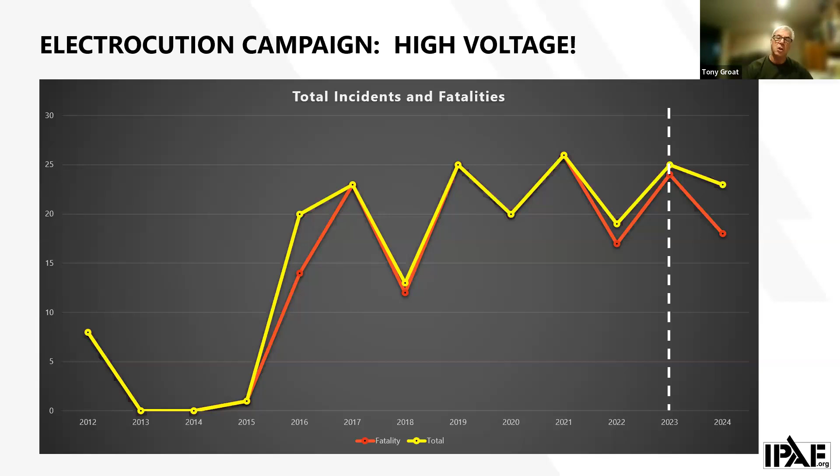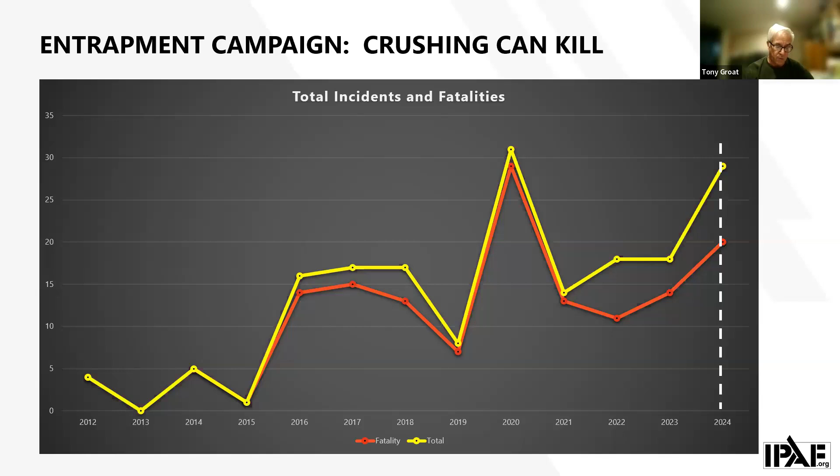Launched in 2024, our entrapment campaign, Crushing Can Kill. Here we see a rise in the number of incidents, while fatal incidents were on the upswing in 2022, following a significant decline from 2020 to 2022. The campaign received over 13,000 views from 110 countries.

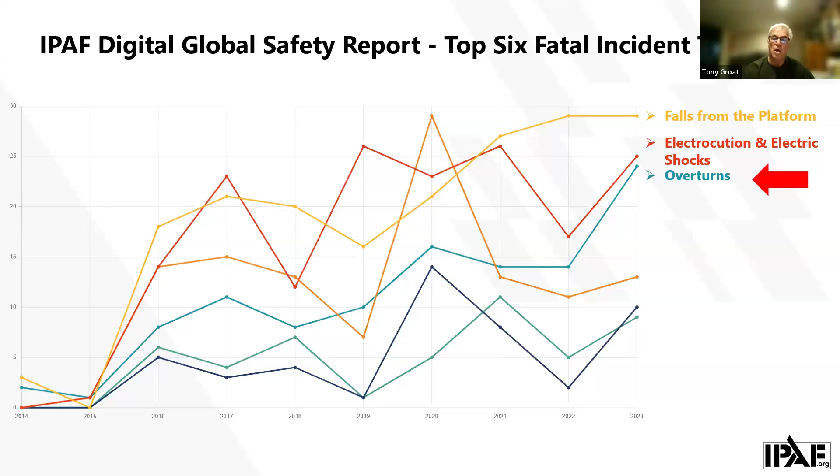So again, as we're looking at accident data reporting, this is MEWP-specific information that we as IPAF pulled through. Looking at the frequency of incidents, overturns are one of the areas that obviously required our attention, and hence we end up having our campaign on MEWP tip overs.

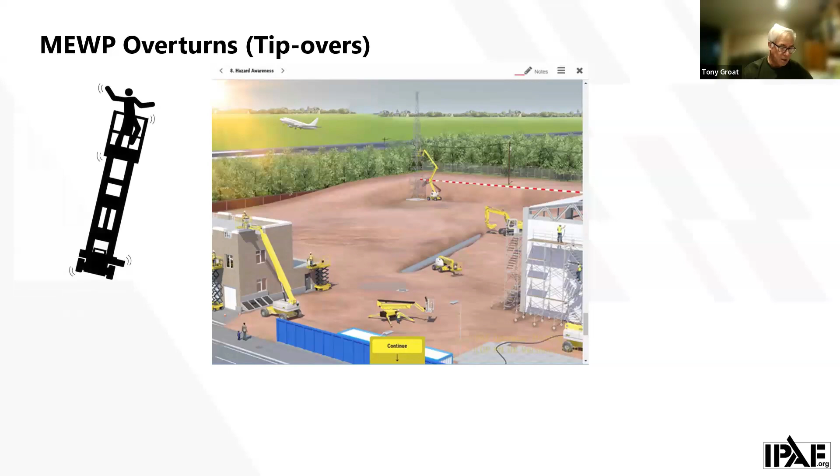MEWP tip overs continue to be a major cause of serious injuries and fatalities in our industry. With the launch of our 2025 global campaign, Stop Overturns, Safety Starts at the Ground, we are reinforcing a crucial message: ground conditions matter. By understanding the risk and implementation of proper safety measures, we can prevent overturns, protect lives, and create safer work environments worldwide.

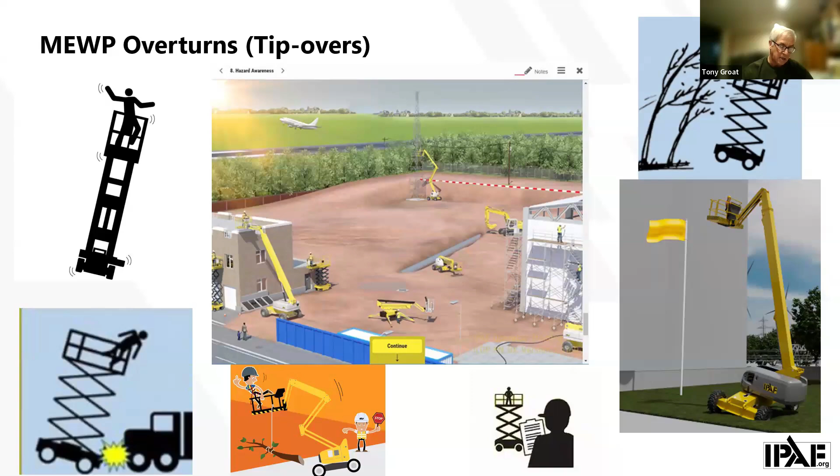Again, these campaigns are out here for us all to work together to make a measurable impact to decrease these incidents in our marketplace.

The key message we want to put out here is that these incidents do cause serious and fatal incidents. They can lead to ejections from the work platform of operators and occupants, and they can lead to complex rescue scenarios of trapped individuals at height as well.

So understand that when we're talking about overturns, overturn is a permanent loss of stability of the MEWP, so that the MEWP has overturned or partially overturned. This can include those things that are resting against an external structure as opposed to completely falling over. So all of those are what are included in our analysis of an overturn.

If we look at our data from 2014 to 2023 on overturns, there have been a total of 108 fatalities. It also includes 64 major injuries, 25 minor injuries. And these are only the reports that get reported into our system, so our assumption is there's more than that occurring globally in the marketplace.

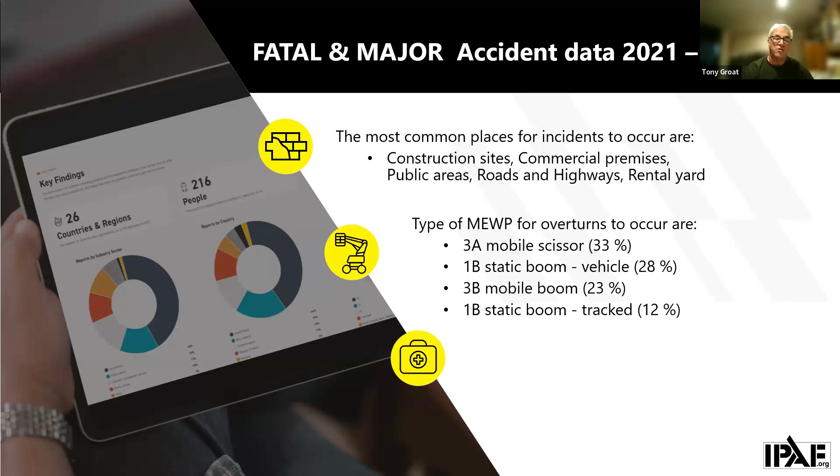So there's a wide range of products that need to be addressed when you're looking at putting in appropriate action steps. Non-fatal injuries resulted, including fractures, concussions, bruising, impact pain, cuts and lacerations. So you can see there's a wide range of impact reported that we need to make sure we're taking the appropriate steps on.

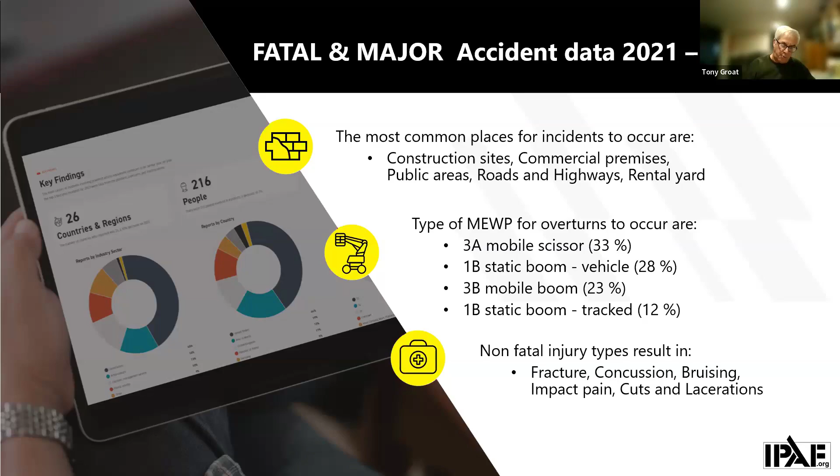Again, assessment of the ground conditions and supporting structures is really critical. And we have recently developed this new guidance document that is available free, downloadable from our website, Ground Conditions and Supporting Structures for the Safe Use of MEWPs.

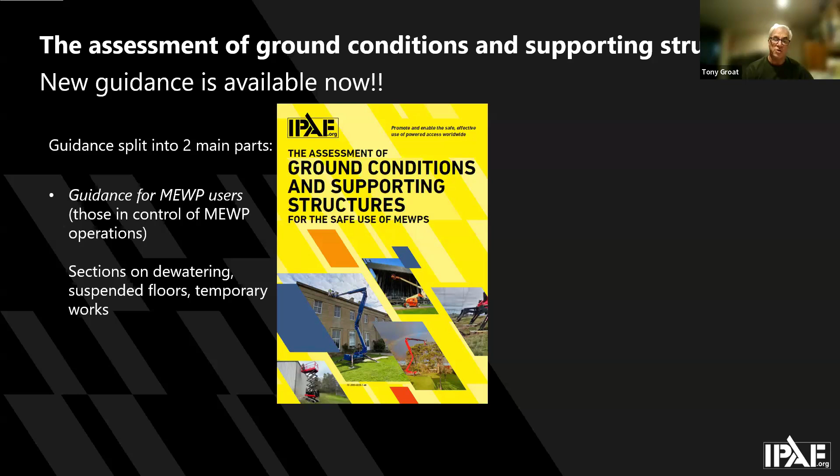So within this, you can look at, there are several approaches within this guidance document. It's split into two main parts. One is guidance for the MEWP users, and within the scope of that, that's those people who are in control of the operations, not the operating of the equipment itself, but the operation of the site. It has sections that talk about dewatering, suspended floors, and temporary works. And the second part is guidance for the MEWP operator. So it really is a wide-ranging document that provides for both planning and operation of the equipment.

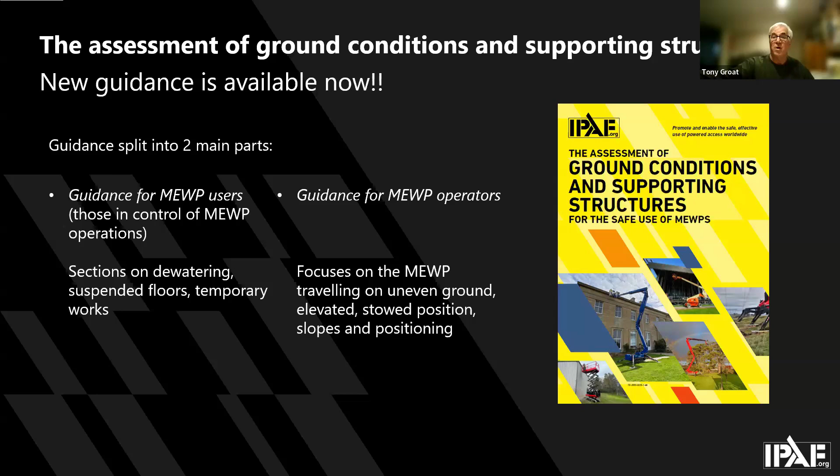And for the operator, it focuses on MEWP traveling on uneven ground, elevated stowed positions, slopes, and positioning. So there's a wide range of information in this document that ties to our campaign on being aware of it. Now this is about taking actions on how to protect ourselves.

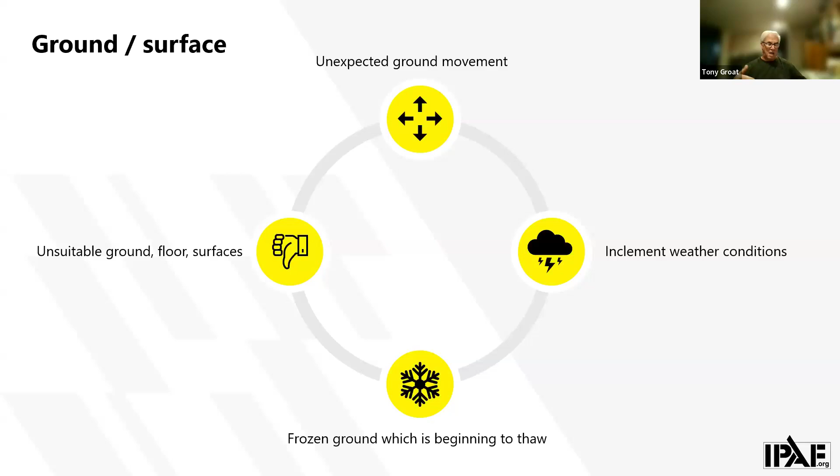So when we're looking at this information, we talk about ground and surface for the machines that are operating. So we end up having unexpected ground movement, near the edge of an embankment, or driving over a vault in the ground. So you're going to have a wide range of unsuitable ground conditions, floor surfaces, frozen ground that's beginning to thaw. So you end up having environmental conditions out there that tie into weather conditions as well.

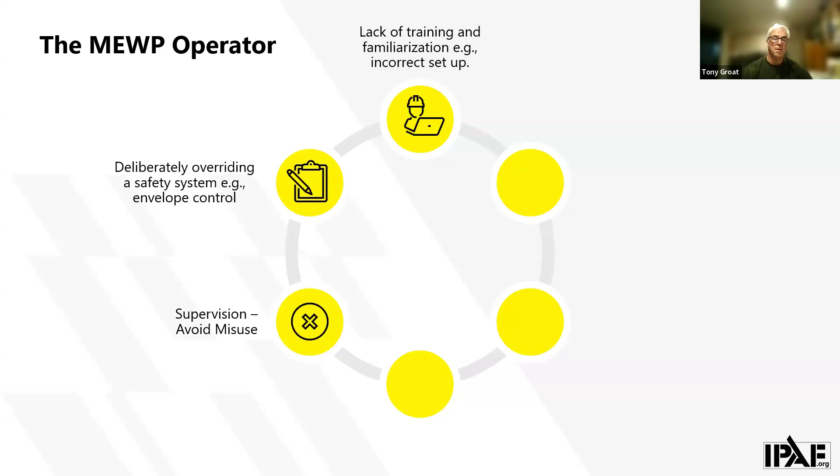So beyond the ground and surface, we also look at the MEWP operator. Within the scope of the MEWP operator, one thing we look at is a lack of training or familiarization, or incorrect setup based on insufficient training and familiarization. You have individuals who deliberately override safety systems, such as the envelope control system. We have supervision required to ensure avoidance of misuse of the equipment. Driving at height when it's not necessary.

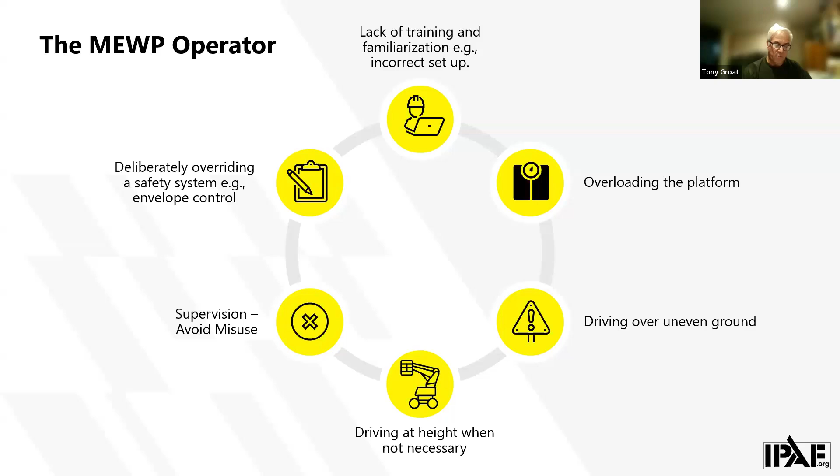So when it's fully extended, we have one of the, I'd say, weaker positions for stability of a mobile elevated work platform, and driving over uneven ground and not following all the operating requirements from the manufacturer, and overloading the platform. So again, all of these things are items that the operator themselves have to take into consideration.

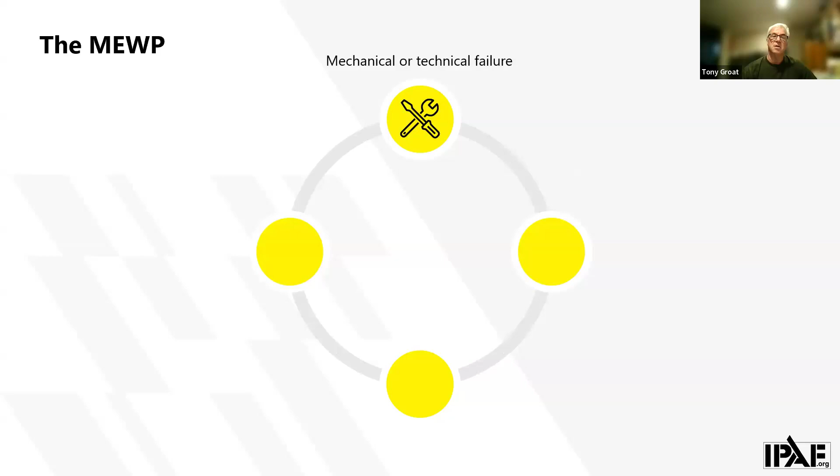And then we take the machine itself. Is it properly inspected and serviced, so that we avoid mechanical or technical failures? Are we driving it onto a hazard that's not capable of supporting the MEWP itself?

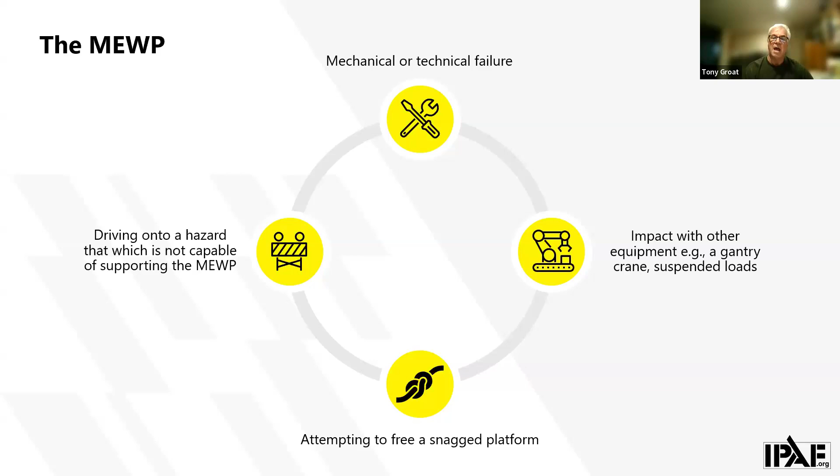So if we have a machine that's what we call snagged, as an example, where it's lowering, the platform comes down and gets snagged onto some structural item. Then what happens is that you continue to lower, and rather than the platform moving because it's snagged, it actually lifts up the machine, and we end up having a snagged platform and a very precarious situation that needs to be dealt with. And then we have impact with other equipment, gantry cranes, suspended loads. So there's a wide range that can impact the MEWP itself.

So again, planning is really critical. While we are always aware of the fact that we need proper training for operators, that is an essential component, but we need to do planning before the job even begins.

So when we're looking at this, it starts with doing a site assessment for the correct MEWP selection. We'll get into that a bit later, not just is it a boom lift or a scissor lift, but other attributes a MEWP needs to take into consideration in selection.

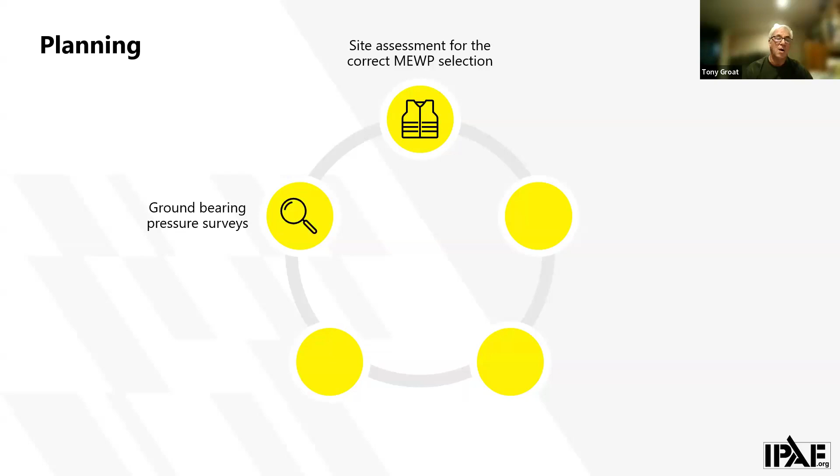The ground bearing pressure surveys - what is the ground capable of supporting?

The consultation with those in control of the site itself. Again, if you're working on one part of the job and you have other people over there doing other things like excavating around the job site, and you're not aware of them not compacting it properly, you need to make sure of the site conditions.

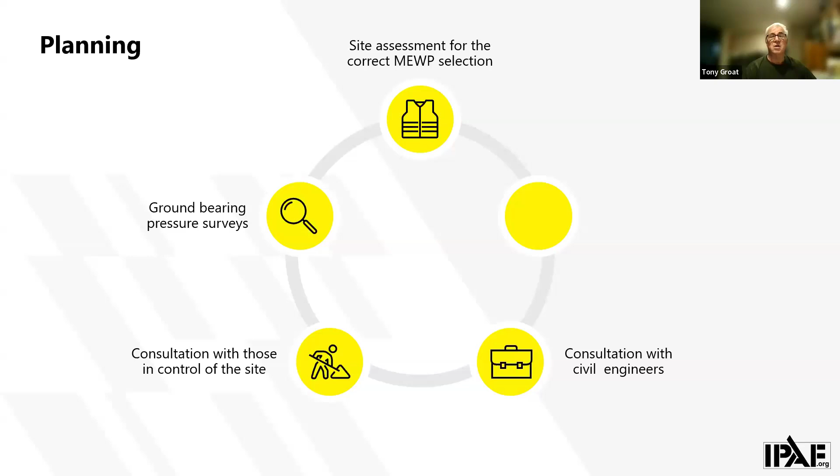When you're looking at the ground conditions, believe me, most operators are not sufficiently technically able to understand whether certain ground conditions can support the load or not. You provide them with a lift, you put them out on the job site.

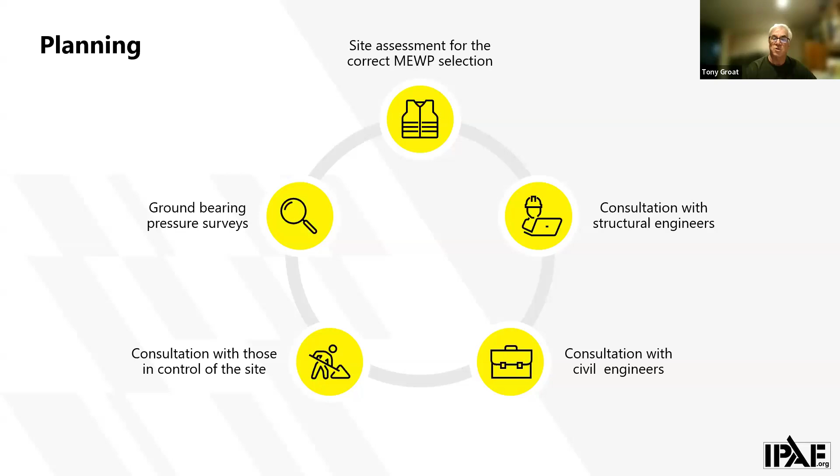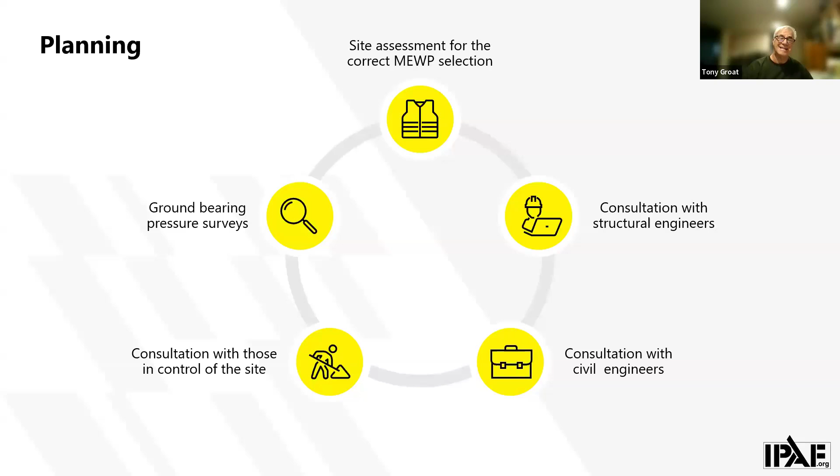So you need to, in your planning, consult with engineers - either a civil engineer or a structural engineer, based on the material that you're working on, whether it's grade material or a supported deck, to ensure that it is capable of supporting the load of this equipment.

It really is critical in training, and this goes for both a MEWP operator and MEWP supervisors - they must be included in understanding MEWP stability. When you look at our industry standards and the curriculum required for both MEWP operators and MEWP supervisors, understanding stability is a critical part of that training.

So there are many factors to consider that can impact MEWP stability. Just reading off this slide, you can see - is it a hard level surface? What is the allowable slope allowed for that machine? What is the slope of the grade you're working on? What's the platform capacity, so we're not overloading the platform? We have live loads. Are we overriding safety devices?

Oh, that thing is beeping. It's annoying me. And we go in there and try to disconnect incorrectly, overriding safety devices.

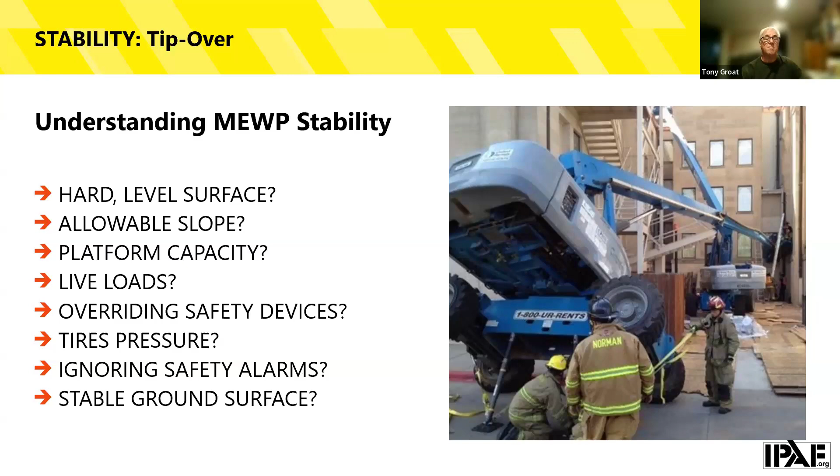Tire pressure, big item as well. Ignoring safety alarms, stability of the ground surfaces are amongst many items that must be taken into consideration.

So again, as we now look forward in understanding MEWP stability, there's a wide range of information that is important for people to really have some basic understanding of. And again, as we all know, gravity is king. It's important that the MEWP operator and supervisors understand this information. Simply stated, gravity is the force that pulls an object to the center of the earth, people and MEWPs included.

You can increase the area of the base - the wider it is or the longer the chassis, or like adding outriggers to it, provides that additional stability. So that gets into somewhat of the selection of the equipment itself.

Be aware that when you point at the manufacturer and say, well, why don't they design these things so that they're going to be greater in their ability to be stable - understand that if they increase the weight of these machines, they could become so heavy that you can't put them on any ground surface. If you increase the base of them so large, you can't get them into the places these machines need to go into.

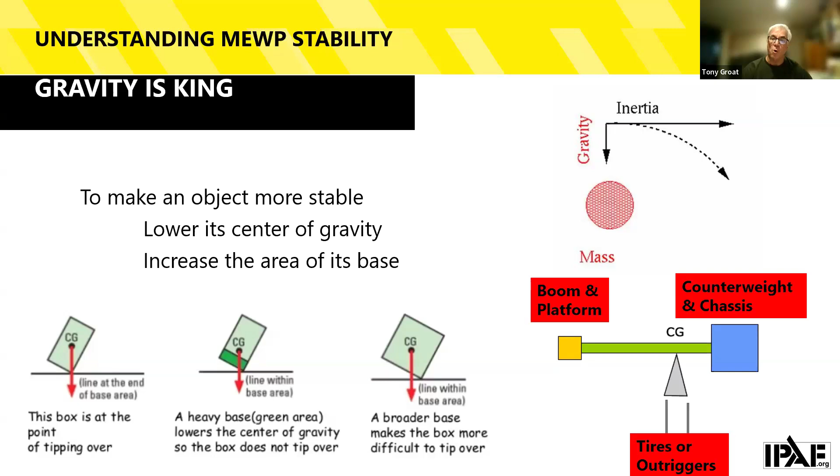So there is a design theory behind all of the machines that you're seeing out in the field, giving you a wide range of options in the selection of them to ensure that you're getting the right machine for the right job, task, and that will safely be supported by the surface that you're on.

So where is the tipping point of those machines? It's where is that load, where's that center of gravity? It really is having that understanding.

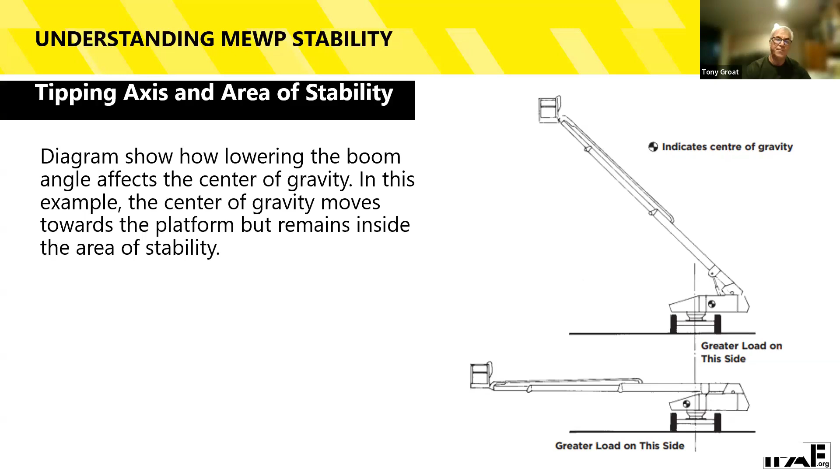So too often people go over and look at a lift and say, okay, if this machine weighs 20,000 pounds and I have 4 tires, that means I have 5,000 pounds under each one of these tires. That is not the case when you're looking at the change in configuration, because there are times when you can have almost 3/4 of the load over one of those points of contact based on the configuration.

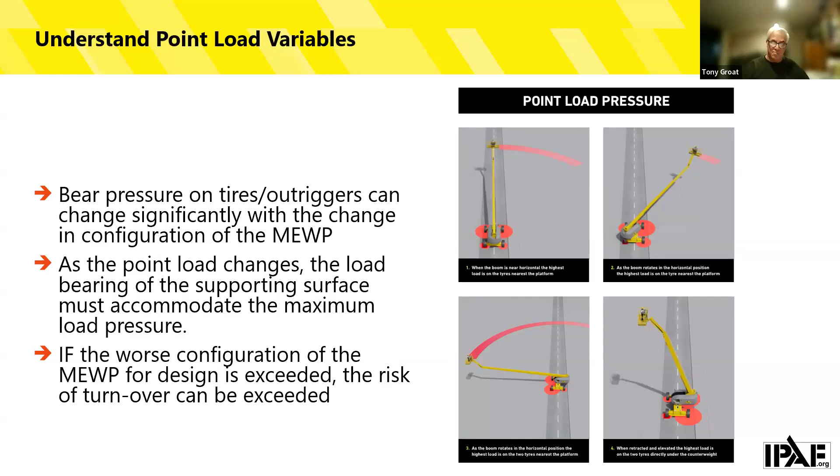So while we're looking at the selection of the MEWP, again too often we're looking up in the air. Our focus here starts at the ground. We begin with this mindset that I need to go up there, so I'm looking at what do I need to get up there, how high can it go, how far can it reach, and what's the capacity of the platform. But the ground bearing pressure is really critical.

The surface area of the point of contact of a tire of a MEWP is relatively small, which can generate significant pressure on that surface area. It's essential that an assessment of the ground conditions, taking into consideration the manufacturer's floor point loads, is carried out before even beginning a job and selecting the MEWP for the job. A tire that's too hard or too soft will impact the way the machine contacts the ground as well. When carrying people and material at height, these factors are extremely important in the safe use of the machines.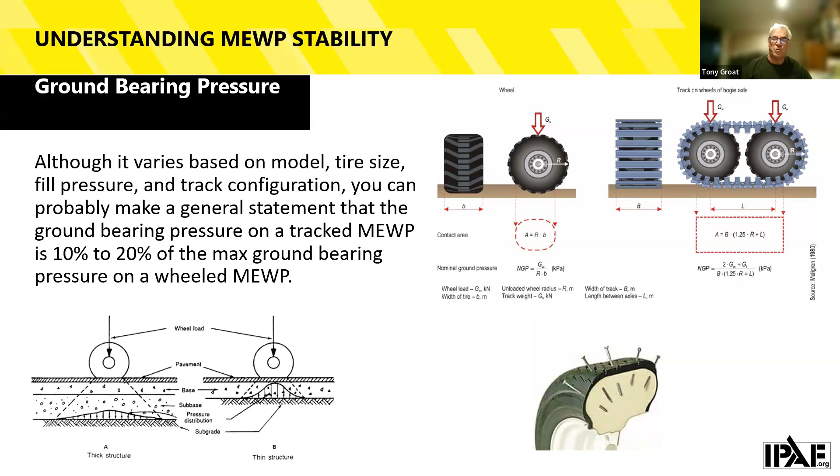Too often we'll go over and just say, okay, we could go with a lighter machine. We have machines that have outriggers on them, but outriggers provide several stability advantages that a tire machine doesn't. They increase the base of the machine to displace the load and are generally equipped with spreader pads to increase the load bearing surface of contact.

Many of them weigh much less than a MEWP that has counterweights to allow you to go to those heights without outriggers. At the same time, stability is dependent upon the distribution of the weight on the ground below, similar to the needs of tires making contact with the ground. Spreader plates used with MEWP outriggers spread that force from the outrigger leg to the ground surface.

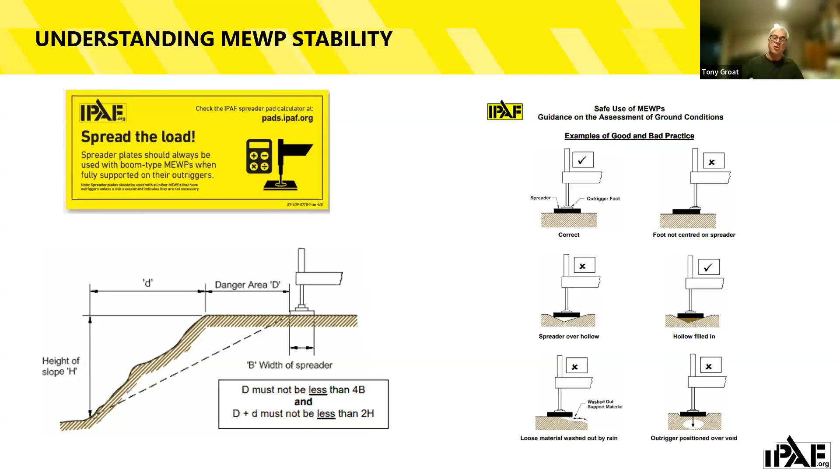A lot of times you can see the spreader pads need to have a plate underneath them to spread that load out further. Depending on the ground surface you're having, you can see all these configurations here, since too often you're not working with a nice flat surface. You need to make sure you're setting these things up properly and preparing them for use in operation.

So when we have an unlevel surface, we talk about cribbing underneath it. Think about it: the manufacturer has well designed this machine to do all the work, but now you're putting it onto ground conditions that are questionable, that they have no control over. You need to make sure you're doing the proper work to ensure that load is placed onto the ground effectively. There's lots of information out there.

Here you can read through charts: do not use cribbing on a flat surface that's not firm and capable of supporting the weight of the machine without the cribbing. Do not use cribbing over a hole, depression, or a bump. Do not crib a machine on a slope greater than 5 degrees or 9%.

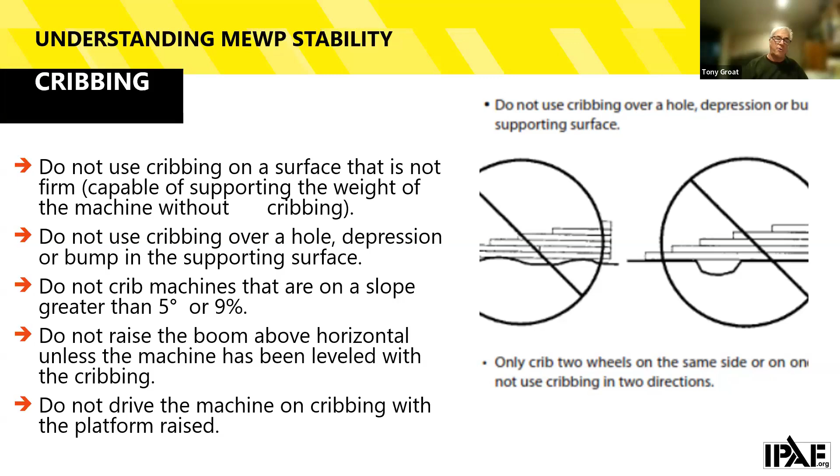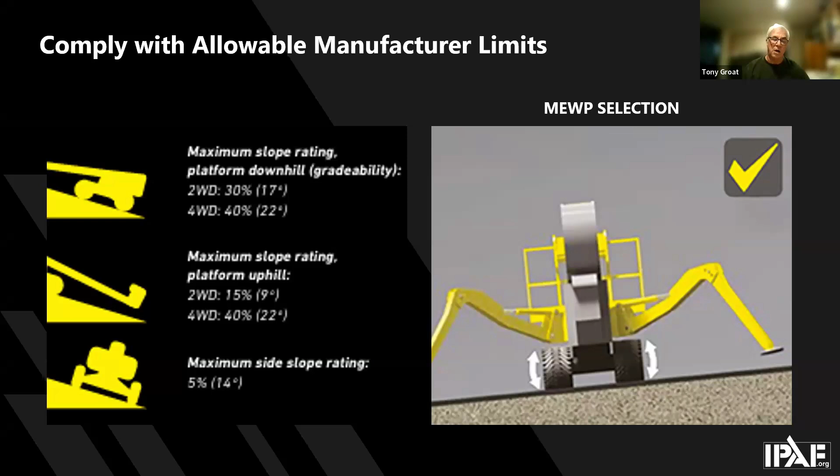The manufacturers in their operating manuals will have information that provides this guidance as well, so make sure you're reading the operator's manual to ensure you're following all of it. This is an example of some of the ratings that manufacturers provide in the marketplace. It's really critical to be aware of those and follow them in place.

This is another one of the videos that IPAF has in some of our training programs, and it talks about subsurface voids. Here it looks like we have a good flat surface to drive over, but as you're going over, we have subsurface voids.

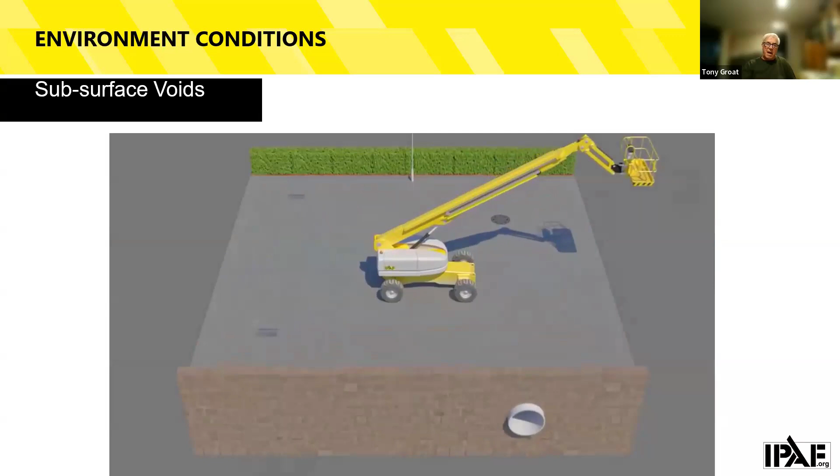It's really critical to understand that if this were a parking lot or even a parking garage, while this is designed to take the load of a vehicle or car weighing 3 to 5,000 pounds, one of these machines weighs 20 to 30,000 pounds.

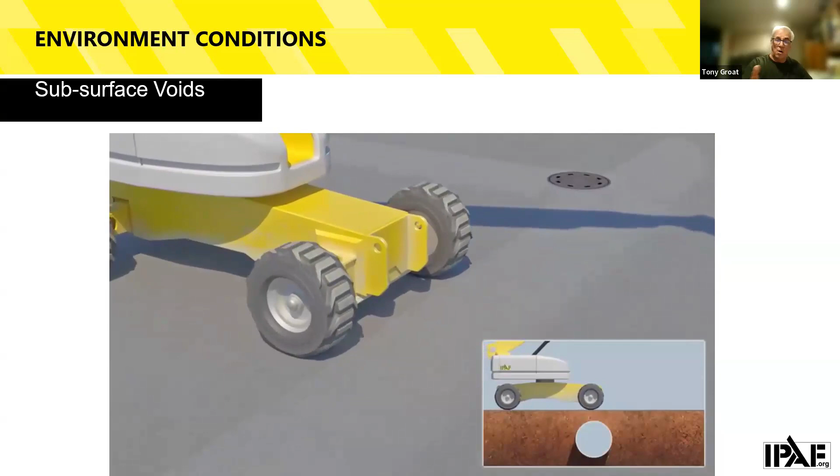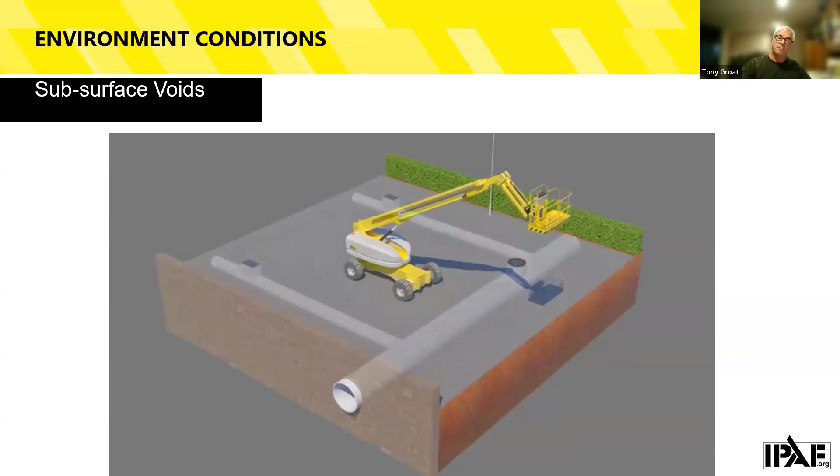So the design for this may not be made to support the load of a machine going over it, which is why we're talking about having people who understand the loading, who can tell you that information. Don't expect that an operator is going to have that information to say, oh, okay, this is fine. They may raise the flag saying, I see that this underground surface area may be in question, but you need to go to somebody who has the technical expertise to really define whether it's safe to use, and whether a different machine should be selected because of the weight of the machine.

Our focus for this campaign is about ground surfaces, but there are other areas you need to be aware of that impact tip overs. I'm including those as a side note: hit or struck-by incidents and roadways.

Our IPAF accident reports tell us that MEWPs being hit by vehicles or objects is still very commonplace. When you're working alongside roadways or next to crane operations, you need to make sure you put control measures in place: planning and supervision, segregating the machine well, putting lighting or signage in place, and reinforcing training and familiarization with operators about the potential hazards on that site.

So again, taking that into the risk assessment and coming up with method statements and control measures to mitigate any of these potential hazards.

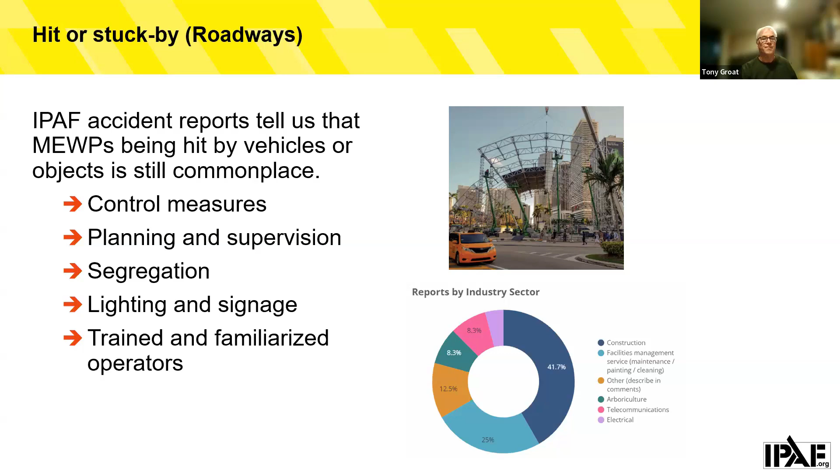Again, in that same breath, being struck by—you end up having cranes oftentimes feeding work materials onto the proximity of the MEWP operations. These are really critical things where planning is essential, and you need to make sure you are doing what's proper in your planning, risk assessments, and actions to protect your workers and others in the area.

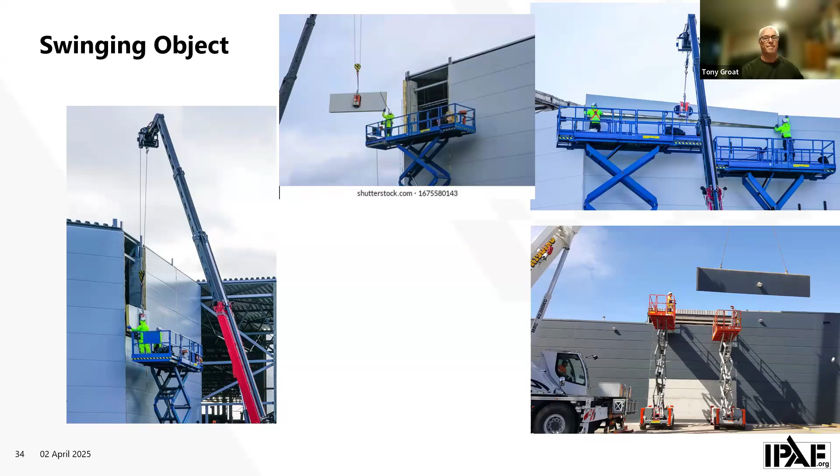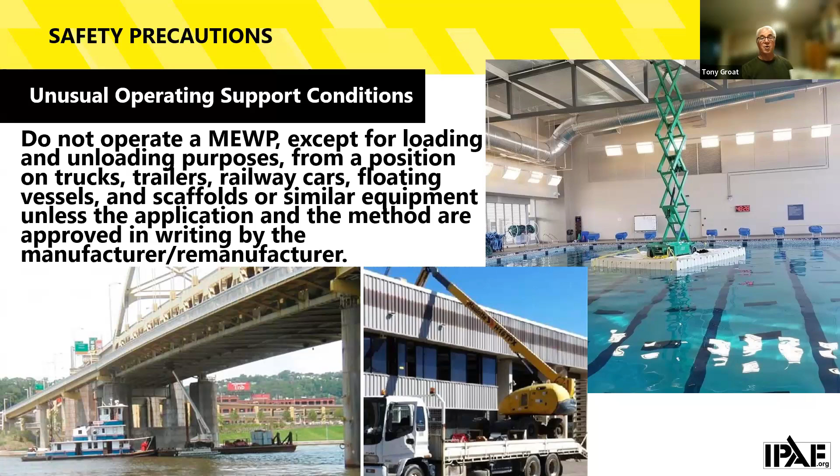From a standard perspective, it's very clear that the language says do not operate a MEWP except for loading and unloading purposes from any position on the truck, trailer, rail cars, floating vessel, scaffold, or similar equipment, unless the application and methods are approved in writing by the manufacturer. These are areas where we're talking about tip overs, and it really takes very specialized knowledge to confirm whether it's appropriate or not. Otherwise, the answer is it's not appropriate.

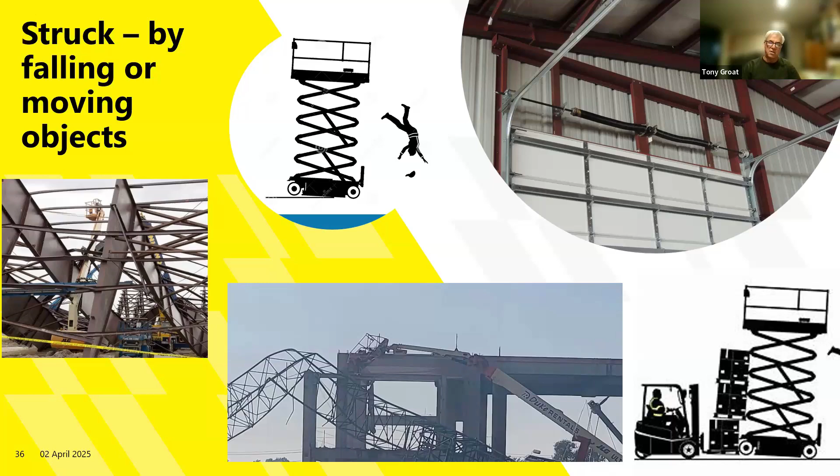Again, struck by falling objects. Unfortunately, we're in situations where we've had buildings actually collapse, and there are easy things to mitigate. While we're out on the roadway, we're talking about vehicles out there. Obviously, we end up having forklifts and moving loads in areas adjacent to where we're using MEWP operations. Unfortunately, it's common to hear about several incidents every year where an overhead door is open—without lockout tagout—that opens in an area where a MEWP is being operated, and we end up having a tip over. So struck-by areas are another place of consideration.

So if I get to the end of this, it says, what do we need to do to be safe? The short answer is that there's no shortcuts. Success lies in overcoming obstacles every day. You can go out there and say, this is what I was planning, but job sites change, conditions change. You were planning on working in the front of the building, but then you have to drive around the back of it to store it at night, and you never thought about that when doing your risk assessments. So you need to be very thorough about your risk assessments and planning.

One of the very critical elements introduced in our most current ANSI safe use standard is the requirement for anyone operating the equipment to develop a MEWP-specific safe use program. This details all of the attributes, not just what we're talking about today, but also the risk assessments and all of the appropriate assessments and methods to protect workers in the operation of this equipment. This guide is also available for free on our website and has lots of accessory tools you can use in your planning.

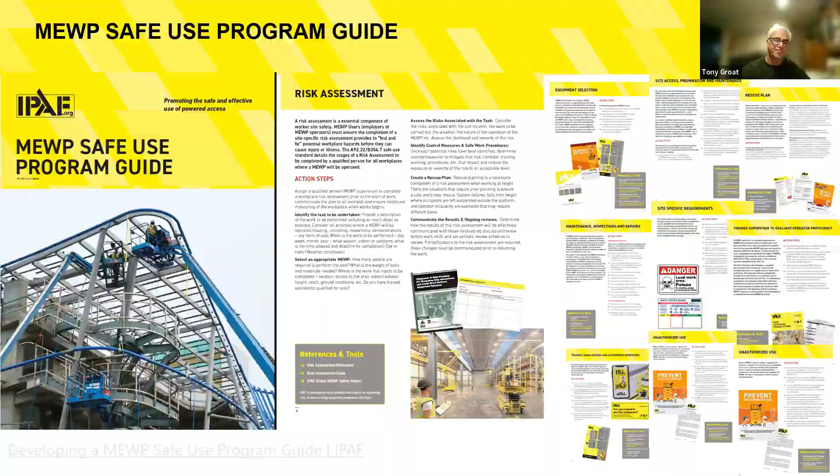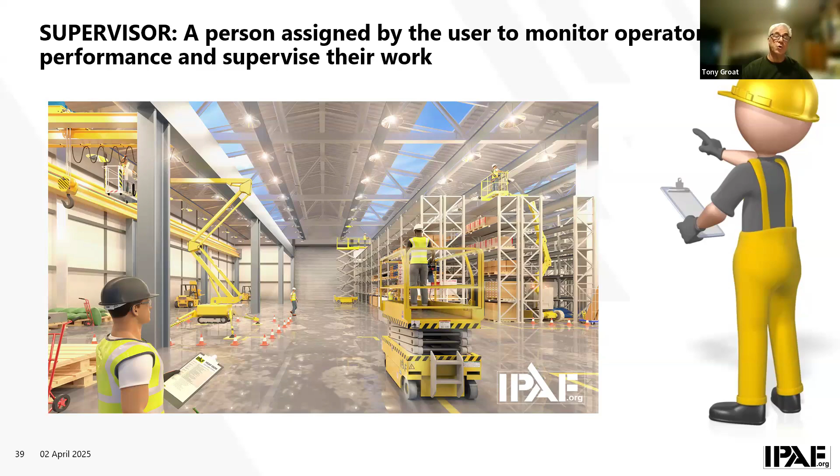One additional element I'll add is that when we introduced these new standards in 2018 and beyond, we introduced a MEWP supervisor, which is a person assigned by the user to monitor the operator's performance and supervise their work. There are lots of responsibilities that a user has that are not responsibilities for an operator. While we do operator training, the operator isn't necessarily doing risk assessments or selection of the equipment, and he's obviously not capable of monitoring himself and developing his skills and knowledge as we move forward. So it's critical that a MEWP supervisor be involved to ensure the operator is being compliant with all the requirements in place.

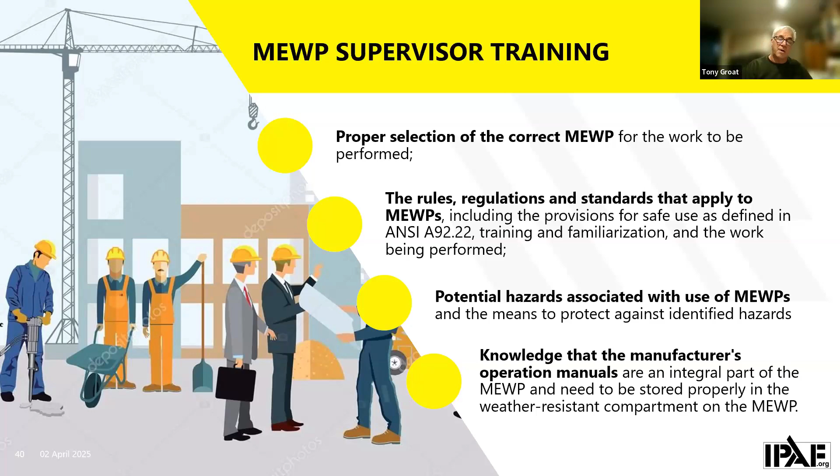Within MEWP supervisor training, these are the specific elements that are part of the curriculum: the proper selection of equipment, the rules and regulations that apply to its safe operation, including all the elements in the A92.22 safe use standard, and that safe use plan, understanding potential hazards associated with the MEWP—a focus of one of these items today, which is machine tip overs—ground conditions, and knowledge of all the manufacturer's operating manuals, making sure you're not driving this machine on grades it's not appropriately allowed to operate on. There's lots of information they must possess and ensure is taking place during the operation of all this equipment.

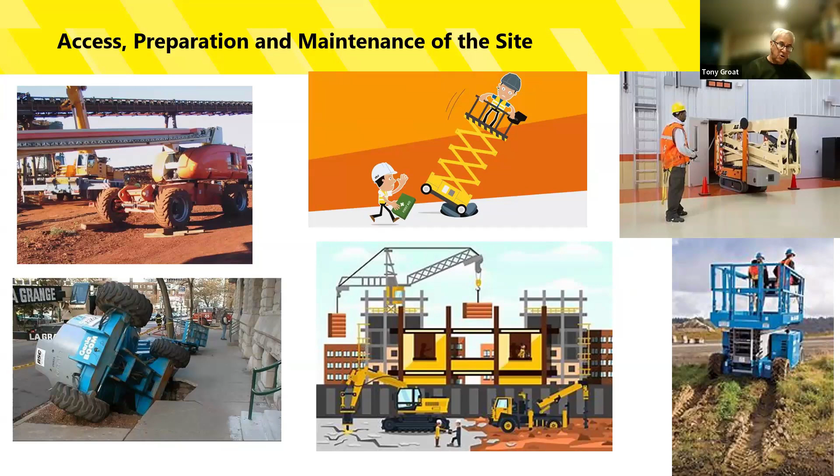So again, there's lots of things that are out there that you need to be aware of in regards to the stability of these machines.

So at the end of the day, we now have this campaign that's out there. We have lots of tools for you, and here are some of the resources that we have. We have this new safety campaign and others that are on our website available for you to download.

We have our new ground assessment document, that document that I showed you earlier, that's available for you to do assessments of ground and provide that education that a supervisor and even operators can benefit from knowing about.

Again, you need to make sure that your people are properly trained and supervised. IPAF has our online supervisor e-learning course so that if you're a supervisor, you can take this online course 24/7, any place in the world, at your own time and pace. So you can go over there and look at that.

Last but not least, as I mentioned in the beginning, we really do encourage all industry stakeholders to consider reporting any incidents that you see. While we can visually see reports on the news or that go through the OSHA reporting structure that says here are these incidents that occur, the near misses, the minor injuries that may take place, we may never see those.

And those things have an impact in places that we may have a perception are an issue, but it's very hard to take action on information that you don't know. So we really do encourage all stakeholders in our industry to really look at that accident reporting.

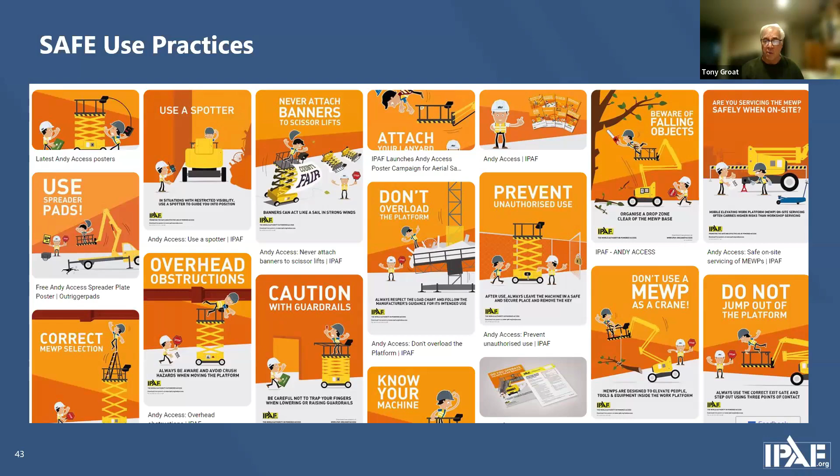Again, while we have this campaign, we have been identifying safe use practices for many years, and IPAF has a full collection of what we call Andy Access posters and some corollary toolbox talks. These are available on our website for you to garner, look at, and move forward with.

So the one thing I bring out in most all of my presentations is feeling safe and being safe are not the same thing. Too often you can look at lots of pictures on social media that you shake your head at and say, well, I can't believe someone's doing that. And too often those extremely unsafe conditions don't result in an accident.

So they're not going to initially even show up on an accident report. And because there wasn't an accident, does that mean that was a safe job site? The fact that they got the job done, they may get kudos, high fives for getting the job done. But it doesn't mean that because they didn't have an accident, they were safe.

It's not the same thing. Safe people do what they need to do, whether they feel like it or not. It's a really critical element. Sometimes I'm out there and I've got to get something done quickly. So sometimes we do things quickly, and quickly doesn't mean unsafe, or it doesn't have to mean unsafe. So again, it's doing the right thing all the time.

So again, we have a safety campaign, and it isn't just about us raising awareness. It's about all of the elements that I talked about up front. It is about prevention of accidents. It would be great for us to go over there and have these campaigns, and people embrace them and change actions and activities to ensure that we reduce these incidents. So we really do encourage everyone to get involved, be part of the solution.